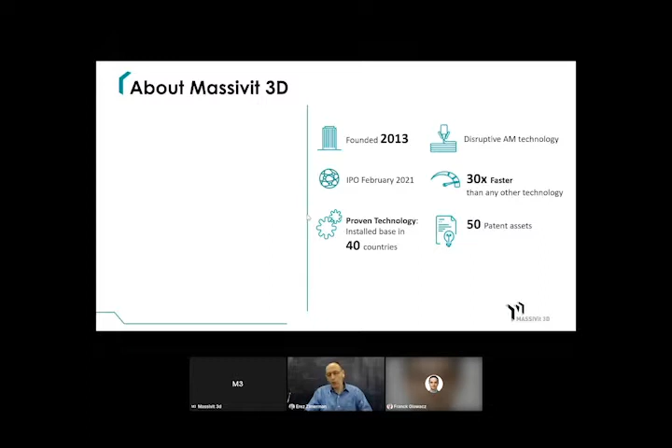Before we start, I would like to explain to you a little bit who we are, who is Massivit 3D. Massivit 3D was founded in 2013, and we have a disruptive technology for additive manufacturing. Our technology's main claim to fame is the ability to print 30 times faster and to produce molds faster than any other technology. Our technology, of course, is backed with 50 patents around the globe. We are a public company traded as of last year, and our proven technology already has an install base in 40 different countries around the globe with more than 164 units from our first generation technology.

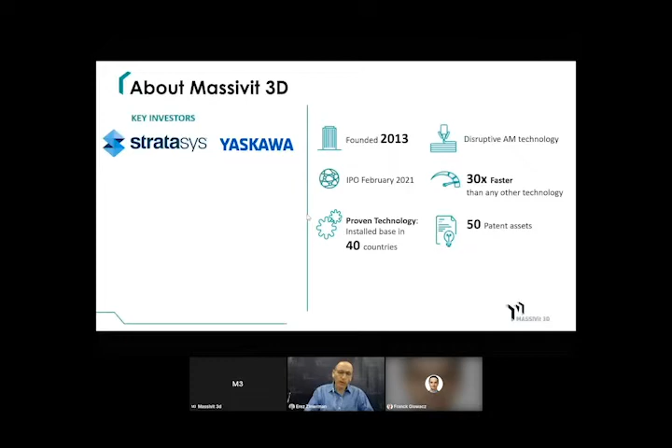A little bit more about the company: our key investors that invested in the company in the past are, first, Stratasys, one of the leading vendors in the 3D printing arena, and Yaskawa, the leading robotic arm Japanese company. Among them, we have financial investors that invest in the company. So that's really a brief slide about us. And Massivit was founded in order to address a strong need for large-scale parts in several industries, like automotive, marine, rail, aerospace, and others.

And usually when we talk about 3D printing, most of the 3D printing is focusing on small scale, let's say the size of a shoebox, and Massivit actually developed a large-scale 3D printer that can literally print a car bumper or train parts in hours instead of weeks.

Now, Benjamin, today we're going to talk about composites manufacturing, and about overcoming the bottlenecks that we have in the production line. Would you like to say a few words about the poll? Yeah, exactly. It's time for the first poll of this webinar. So I'm going to publish it right now. And again, for the audience, I invite you to answer the poll in the poll section at the bottom right of your screen. So let's publish the poll.

So the question is, how do you manufacture molds today? And you have four possible choices. The first one being you manufacture molds through hand layup. The second one being through CNC machining. The third one being through an additive manufacturing system. And the fourth choice is I don't manufacture molds. So please answer the questions.

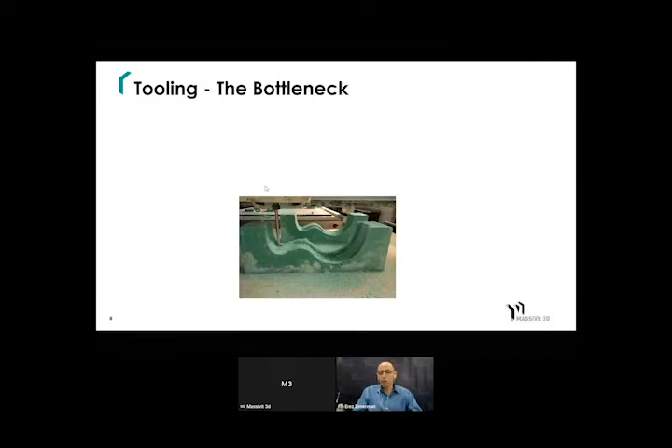And I'm sure that all the audience we have today knows that the bottleneck in producing composite parts, whether it's carbon or fiberglass, is usually the mold. The mold usually takes time to produce. It's slow, it's complicated, it's an expensive process, it creates lots of waste. And I'm sure that you're all familiar with this process.

Now, imagine the conventional mold production, which usually starts in CAD design. The mold production process takes 19 steps, and it usually takes 5 to 8 weeks until you get the final mold, and from there you are producing an end part. Now let's continue our interactive survey with the poll, and Benjamin, the stage is yours for the next poll. Thank you very much, Erez.

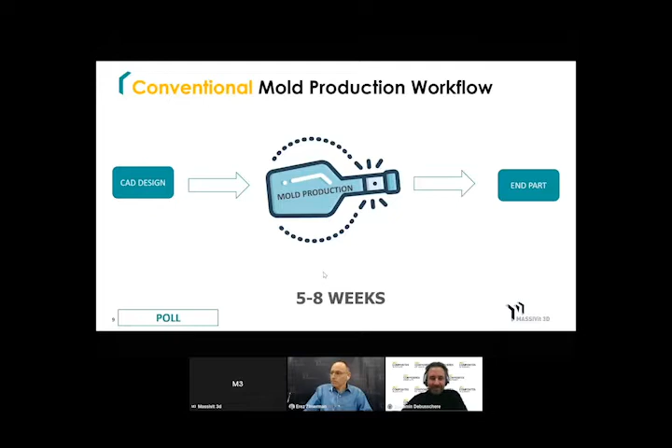So I just published the second poll. The question is, how long does it take you to build a mold? Less than 2 weeks, 2 to 4 weeks, 5 to 8 weeks, or more than 8 weeks. So please vote. And so far, about 50% of the audience answered 2 to 4 weeks. Now it's 40%, 25% 5 to 8 weeks, more than 8 weeks almost 30% now, and less than 2 weeks only 9%.

Can you please repeat the results? Yeah, so 42% is 2 to 4 weeks, 25% is 5 to 8 weeks, 25% again more than 8 weeks, and only 8% less than 2 weeks. So what is the average? It's about, let's say, 6 weeks. 2 to 4 weeks is the main answer.

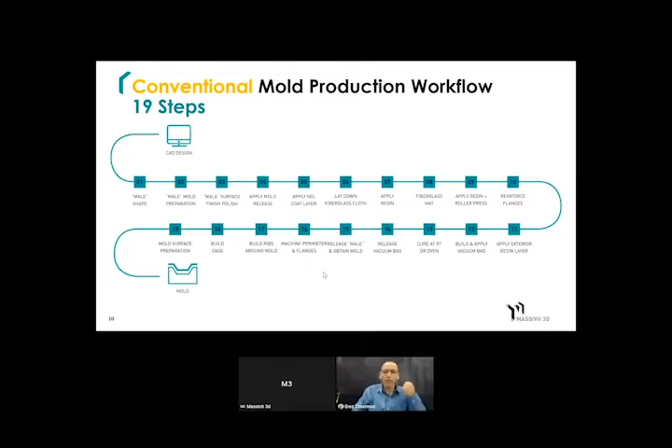The main answer. So imagine that instead of 4 weeks, you can do it in only 5 days. And instead of doing it in 19 steps, doing the male shape and so on and so forth, some people count it a little differently. But imagine that instead of doing it in 4 weeks, as the survey just showed, you can do it with just a click of a button. And instead of doing it in weeks, you can do it in days.

You're going to have the CAD design, you're going to have the Massivit solution, and then you have the mold being prepared. Now, as I mentioned, instead of 19 steps, you can do it in only 4 steps: print the mold, put it in an oven for curing, remove the sacrificial pattern, polish it, whether it's done with CNC or manually, and then you have the final mold.

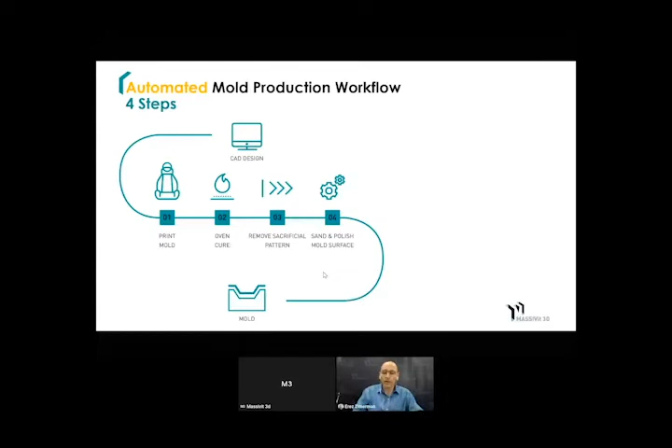Now, during my presentation, I will talk about our groundbreaking technology, and you will see in a minute a video that we prepared that demonstrates what are the 4 steps. Now, we are producing automatic tooling for composites within days.

I'm happy to hear in the previous poll that 15% of the people in this meeting today are using 3D printing to produce molds. And we developed a cutting-edge technology, the Massivit 10,000, that can print directly isotropic molds. And we can do it 30 times faster than any other technology. And as a rule of thumb, we can print about 35 centimeters an hour in the z-axis.

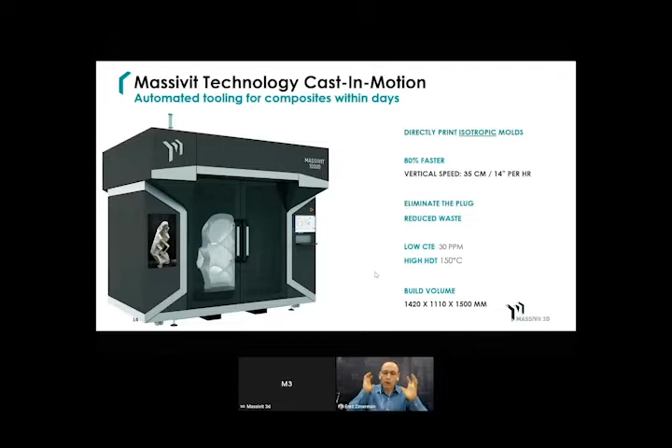There is no need for plugs. You reduce the waste. We have an excellent CTE and HDT, and the build volume is about 1.4 meter by 1.1 by 1.5 meter. Now, you will see in a minute how it works, and let's see this video that demonstrates, and later on you can also see with Nir how we are doing it in a live demonstration. So let's see a quick video of how the technology is working, and I will explain in more detail, of course.

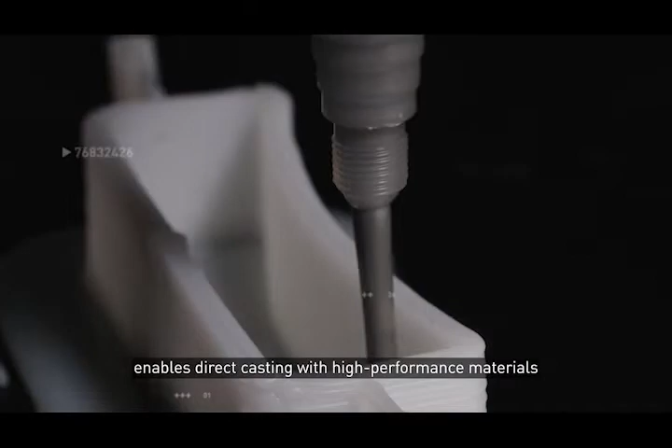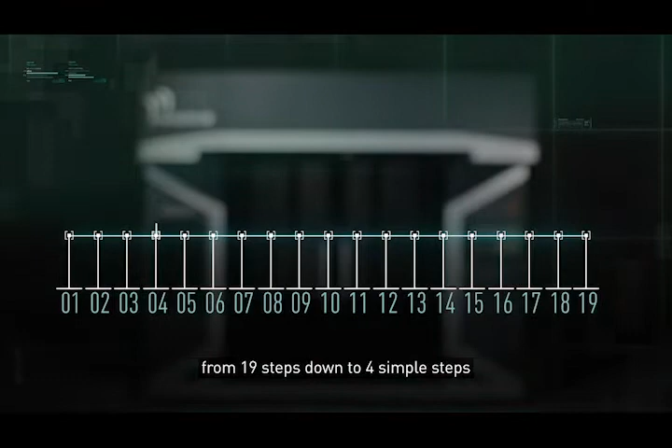The Massivit 10,000 automates tooling for composite manufacturing. This cutting-edge additive manufacturing system enables direct casting with high-performance materials to dramatically speed up tooling. Introducing the world's first isotropic 3D printed mold. The Massivit 10,000 empowers composite material manufacturers to produce custom molds, tools, mandrels, plugs, jigs, and fixtures within a matter of days instead of weeks. The Massivit 10,000 shortens your mold production workflow from 19 steps down to 4 simple steps and eliminates the need for a plug. So how does it work?

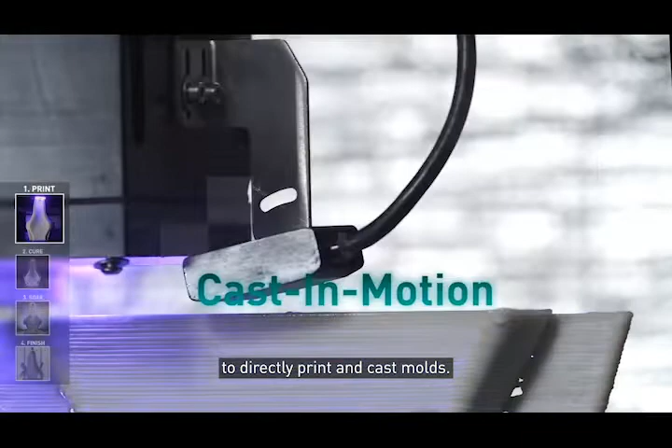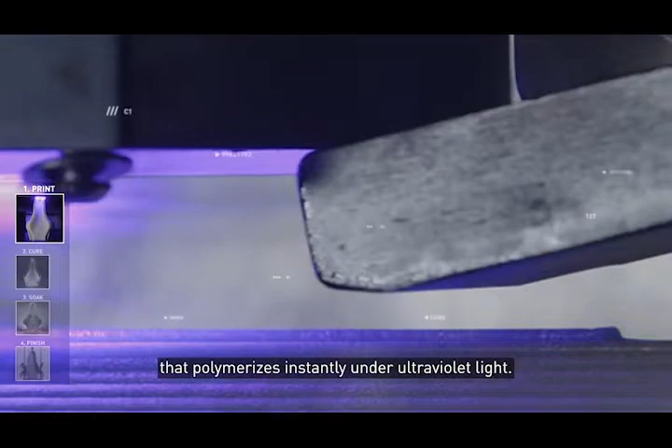The Massivit 10,000 utilizes a dual-head system to directly print and cast molds. Based on an initial CAD design, the first head 3D prints an outer sacrificial shell at high speed. The second head intermittently casts a thermoset material into that shell as it builds. The shell is comprised of 2 thin walls made of water-breakable photopolymer material that polymerizes instantly under ultraviolet light. The thermoset material forms a solid isotropic mold. The mold can then be post-cured in an oven to improve its mechanical properties at elevated temperatures. It is then simply immersed in a bath of plain water, causing the shell to crumble away.

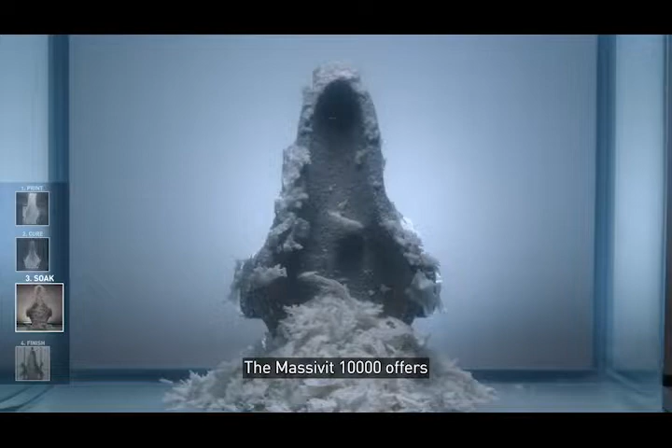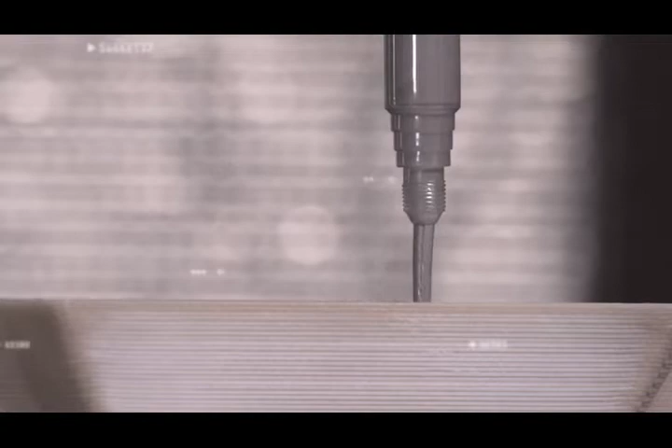The Massivit 10,000 offers near-net shape casting. The mold can be post-finished as needed. Your high-temp, high-performance isotropic mold is now ready for use within less than a week. Benefit from advanced casting materials that ensure consistent mechanical and thermal properties across all axes. Discover digital tooling for a wide range of industries including maritime, automotive, rail, defense, aerospace, sporting goods, and home refurbishments. Join the digital revolution with the award-winning Massivit 10,000 additive tooling system, offering automated, high-speed tooling for composite manufacturing.

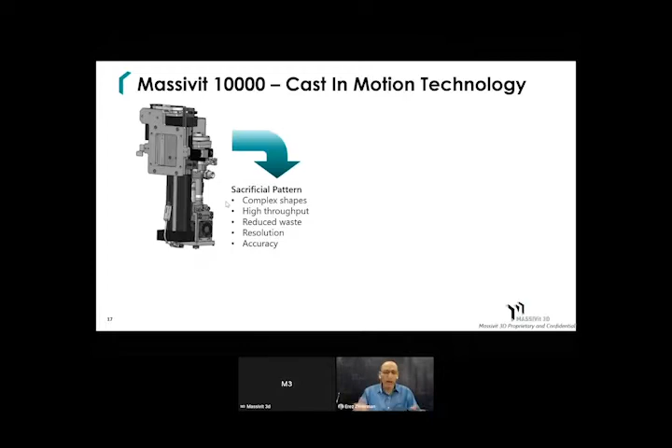So indeed, as you see, we have a disruptive technology that we call Cast in Motion. And I will just emphasize again that we have one head in our printing system, which is called Massivit 10,000, that prints a sacrificial pattern. The sacrificial pattern is printed with water-breakable material that can print complex shapes at high speed. There is no waste creation, and the resolution is high, and of course this is accurate. So that's the first head.

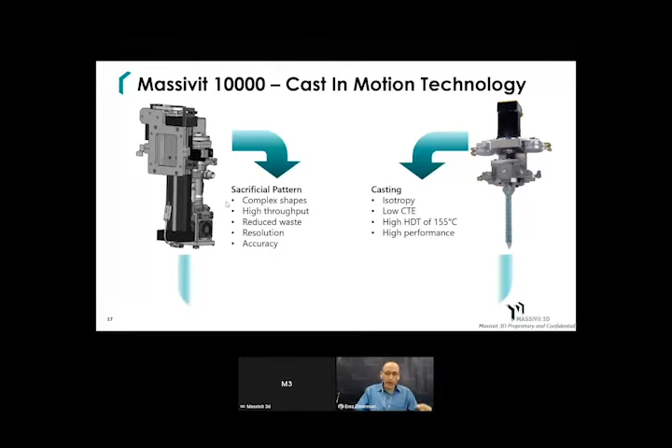And then we have the casting head that actually comes and prints isotropic material with low CTE and high HDT that can actually work in high performance, and this is a durable mold. And this creates efficient digital tooling of molds. Now, the materials, which I'm sure you're all interested in, what are these materials?

So the sacrificial shape or the envelope of the mold is made of an ultra-fast sacrificial shell made of water-breakable material. There is no need for support structure. I see that some of the participants here are familiar with 3D printing. So there is no need for support structure. This is a very unique technology that we have. And then you dip the part in the water and it's unattended shell removal after several hours.

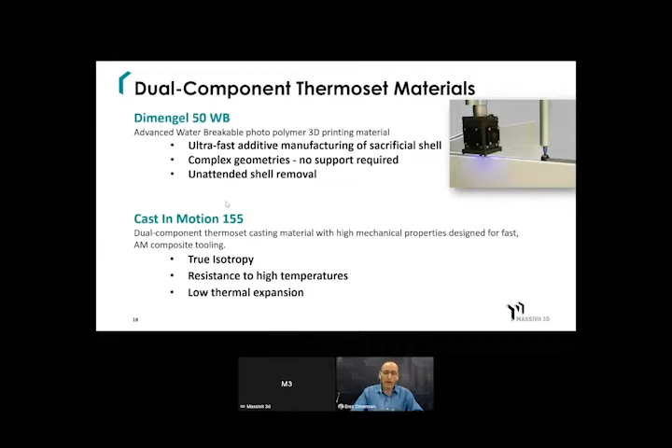Now, the Cast in Motion material, we're actually using an epoxy-based material that has chopped fibers inside and other fillers that bring true isotropic mechanical properties. It has resistance to high temperature and it has low CTE, as I mentioned. Now, this technology enables an 80% reduction in time, dramatically reduces the cost of mold production, and it's almost labor-free, enabling people to do other tasks while they are utilizing our machine.

Now, Benjamin, we have another poll here, and I'm interested to learn what the next survey from our audience today will be. Thank you, Erez. That's true. It's time for the last poll for this webinar. I'm just publishing the question. Have you ever considered producing molds using additive manufacturing? So the answers are simple, yes or no.

Please answer the question. So yeah, most of the audience consider producing molds using additive manufacturing, around 90%. Which is really good. Yeah, 92% consider producing molds using additive manufacturing.

Indeed, this is very encouraging news. I see that the people are open for new technology, and this is important because if people are 92% already engaged with 3D printing technology, they are aware of the pros and cons of 3D, and definitely at Massivit, the fact that we are printing isotropic molds is a game changer in terms of mechanical property of the mold.

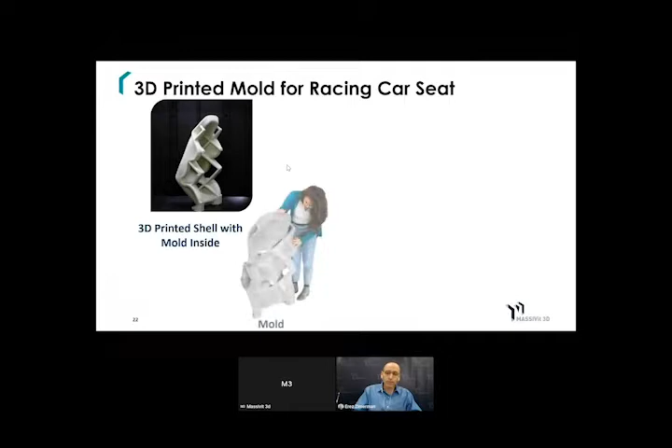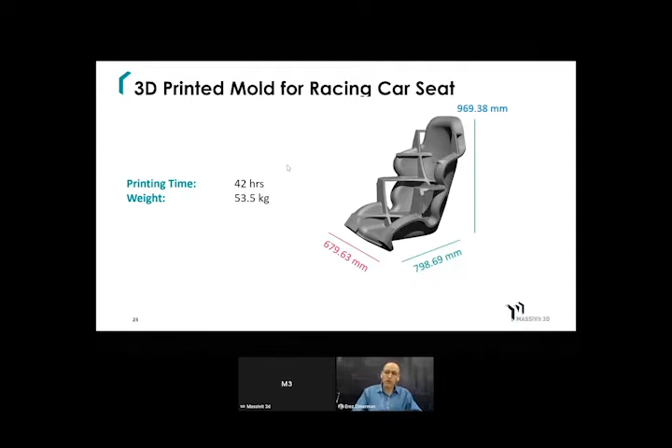So to give you some proportions of size, you can see it's about 90, almost 1 meter height, almost 80 centimeters width, and 67 centimeters width. And you can see that the printing time to produce such a mold will be 42 hours only. And this is why we say, as a rule of thumb, it takes about 5 days to produce such industrial molds. Some of the molds will be much shorter than 5 days.

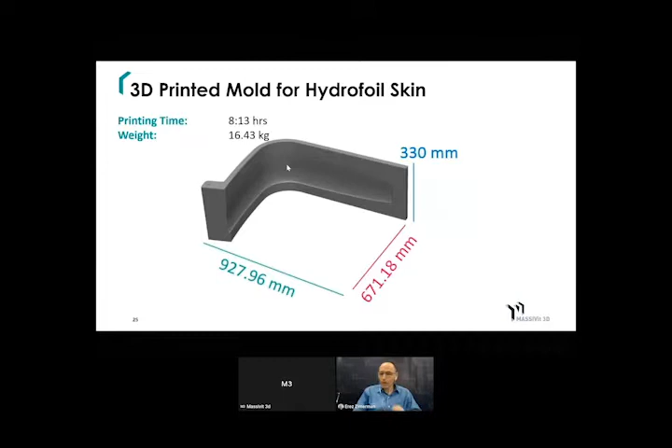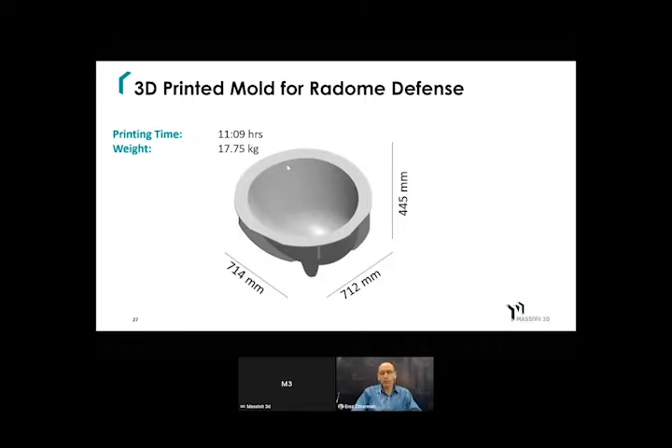Another nice example, this is a radome for the defense industry. You can see this is like the dome in front of this vehicle. And you can see that, again, the proportion is about radius of 71 centimeters, and the z-axis is about 45 centimeters. And to print this radome mold will take about 11 hours only. Imagine how much waste you need to create when you produce this radome in CNC machines.

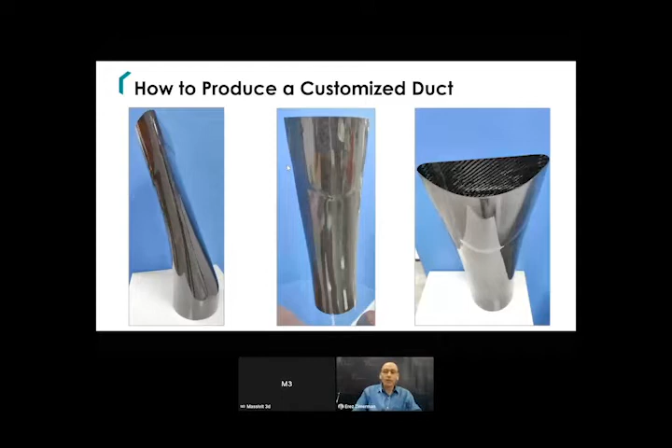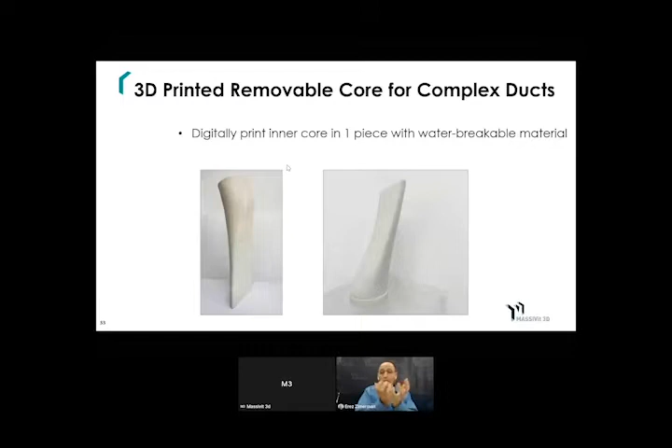And with Massivit, I just want to show you quickly the process. You just bring your CAD, you save it as STL. STL is the format of 3D printing. You drop it to our tray in our Massivit software. You print it as you've seen in the video. This is a water breakable. It printed only the water breakable shell. Then afterwards, you lay up around the printed core with one continuous piece of fabric, sponge it with epoxy, add it into a vacuum bag.

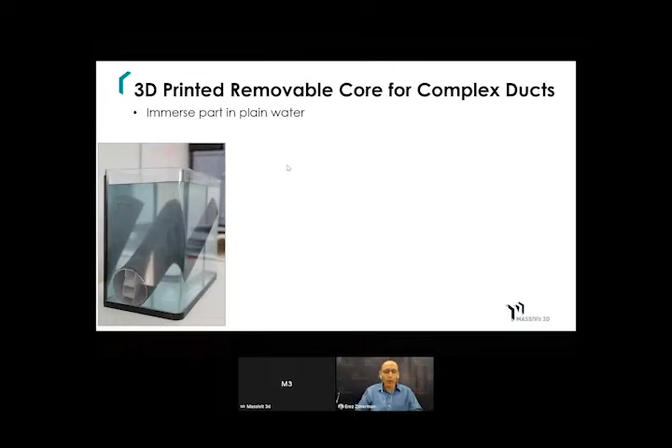Then in order to remove it, it's a one-time sacrificial tool. You're actually dipping it, as you see here, in simple tap water. There is no chemical, very simple, very easy to use. The inner core crumbles into flakes, and it leaves the outside composite duct, as you can see here, as the final product. And again, to produce this part in CNC or alternative technology is ten times more complicated, I would say.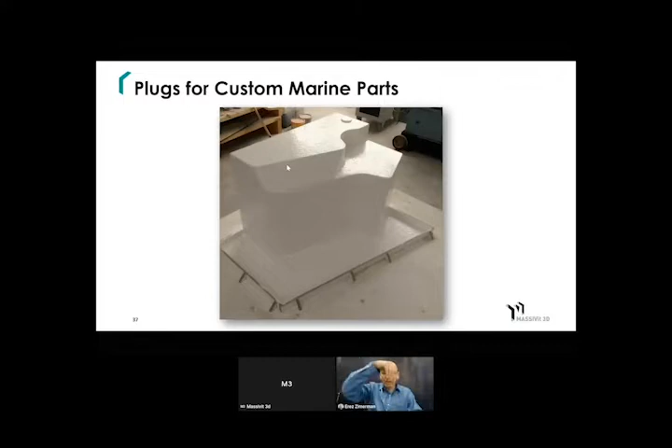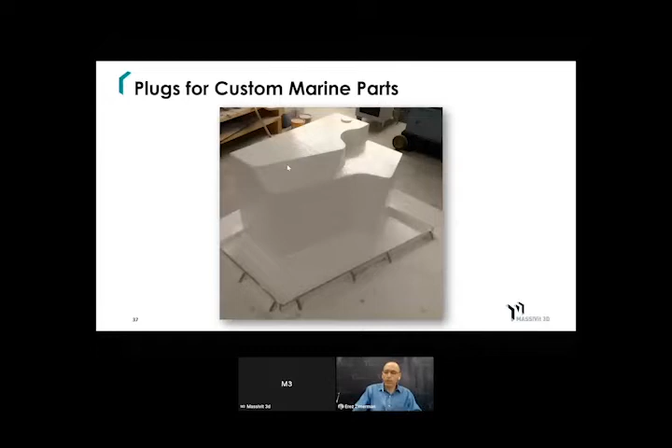Now, plugs. Plug is also very important. I'm sure that you're all familiar. This is very simple to print. As you've seen in the video, you print the shell, cast our material inside, dip it in the water, the walls are falling apart, and then you can use this as a plug. Some people call it master, some people call it a plug. And this is a part, by the way, of a boat for the marine industry. So again, all kinds of applications can utilize our machine.

This machine can also be used for prototyping. You can print all kinds of parts. Here you can see the back area of the yacht was 3D printed, reinforced with fiberglass directly on our material, sanded and polished, and you can see the final part. This is a train where the front bumper was 3D printed with Massivit. And of course, it can be used for other molding applications like thermoforming, utilizing the Massivit 10,000 technology.

I'm sure that you're all veterans and familiar with the composite industry, and we are applying to aerospace, defense, marine, construction, sports goods, automotive, and renewable energies. These are all the use cases and others for composite material. Now, this is all excellent in our presentation, but I think it's very important now to let Nir do a live demonstration from our production line downstairs.

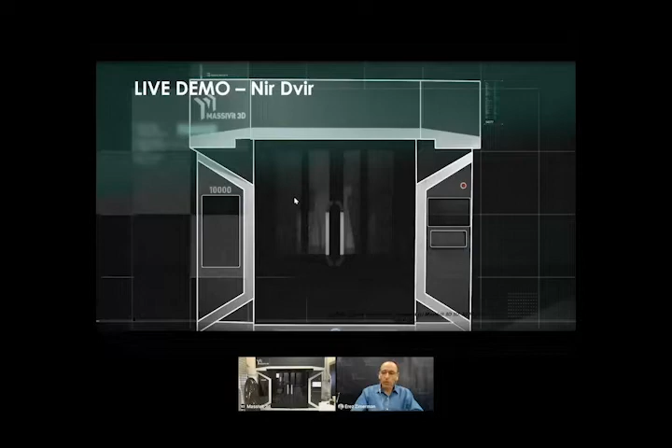So Erez sent a lot of information over, and I want to make it real, to show you the technology and to try and show you a live demo of the Massivit 10,000. We are standing here in Israel at the headquarters, in front of the machine. You can see the volume of the machine. Again, we talk about a print volume of 1.1 by 1.4 and 1.5 meter height.

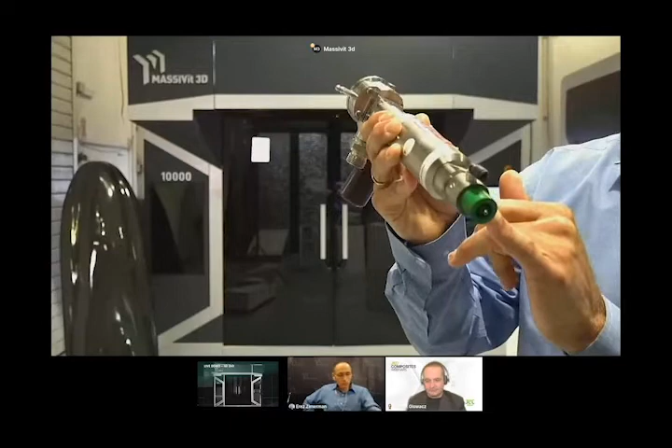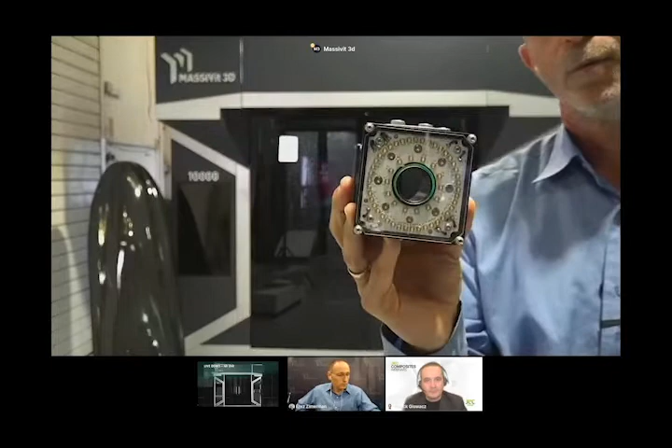The key for us is the fast printing. And how do we do it? First of all, we use our core technology and our dispenser. As you can see here, the dispenser pushes material through a tip that determines the resolution that we can apply. We have different resolutions. On top of the head, you will see that we bring a UV ring. The UV ring that you can see here will cure the layer immediately.

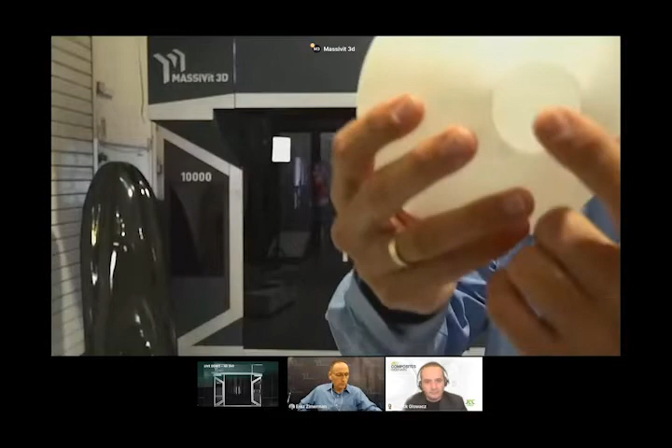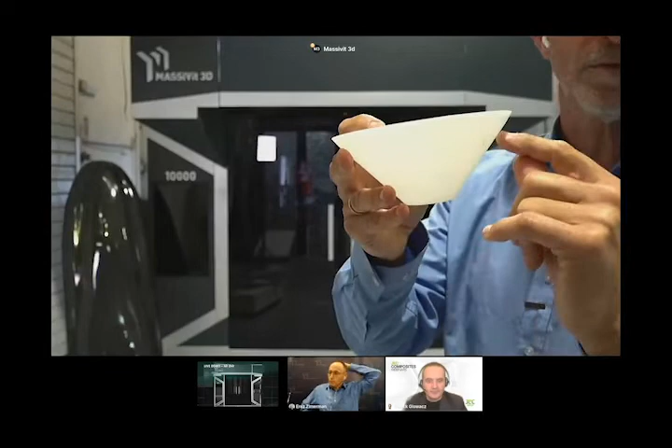It means that I can print layers on top of each other, and in the same way I can print layers next to each other. If I can print layers next to each other, I don't need any infill or support material. For example, this is a hollow object we printed in minutes. I'll try to show it to the camera. It is a hollow object, printed one layer on top of each other and one layer next to each other. By that, I'm saving a lot of material, a lot of cost, a lot of time to remove the infill or support. And this is our GDP technology on which everything is based.

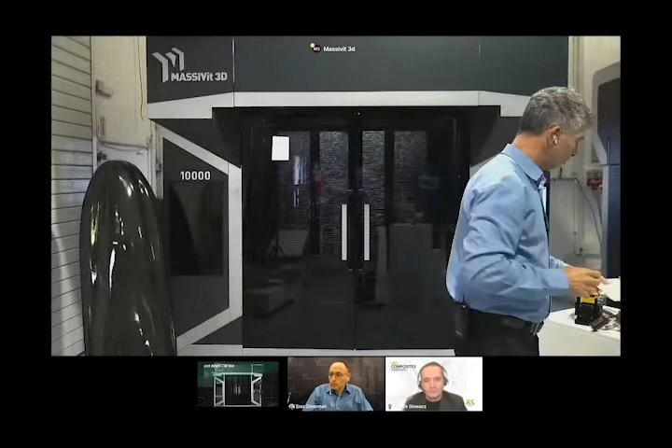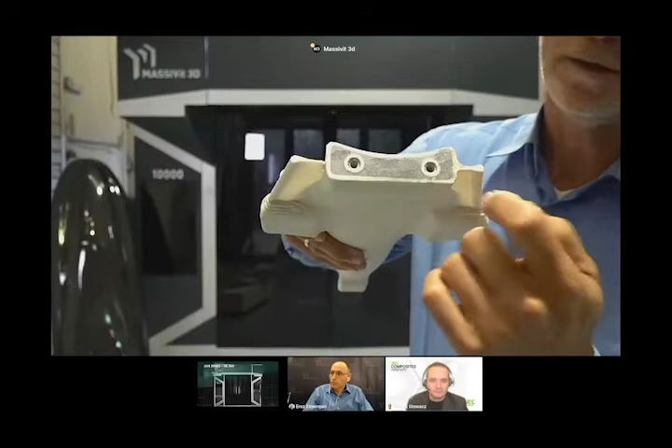Now, adding to that, going into the Massivit 10,000, as presented by Erez, we want to show the cast-in-motion technology. For cast-in-motion, we are using two printing heads. The first head does the shell, as you can see here, the white area, and the gray area is the casted material. Here we talk about epoxy, low CTE, temperature up to 155 degrees Celsius. Once my geometry is printed, I will cure it, I will soak it in water, the shell will fall apart, and I will remain with the mold.

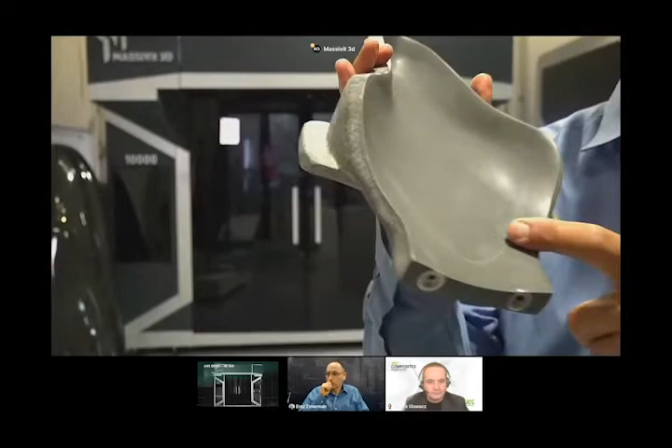This is my mold. This is what I will remain with. Okay, and as you can see, the surface still needs a touch, a small touch. And after the finishing process, I will get a very smooth surface with just a little bit of machining, milling, or sanding, depending on the quality that you want to reach.

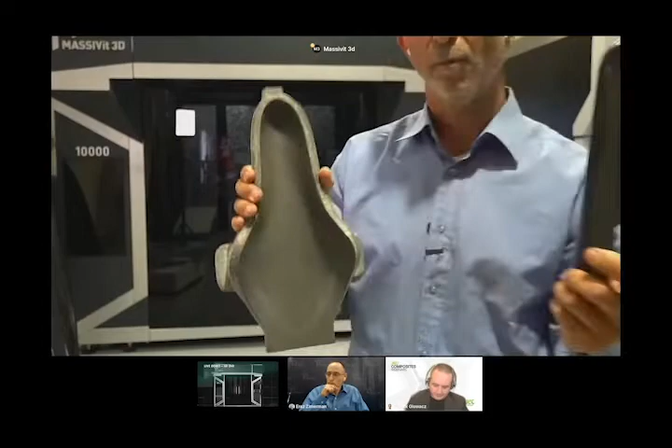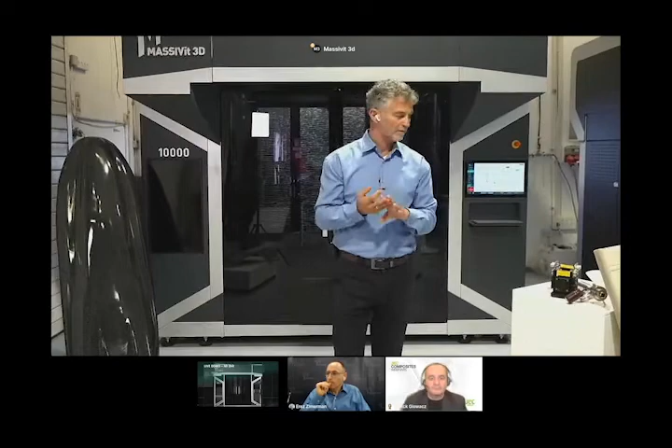Again, you as the end customer, of course, would like to generate carbon parts with the molds that we are preparing in days instead of weeks. Erez was talking about creating molds, creating masters, and also mandrels. I want to show the mandrel. If you have a carbon piece that has an undercut and you want to create it, you need a special mold. Not anymore in this size. You can print a mandrel.

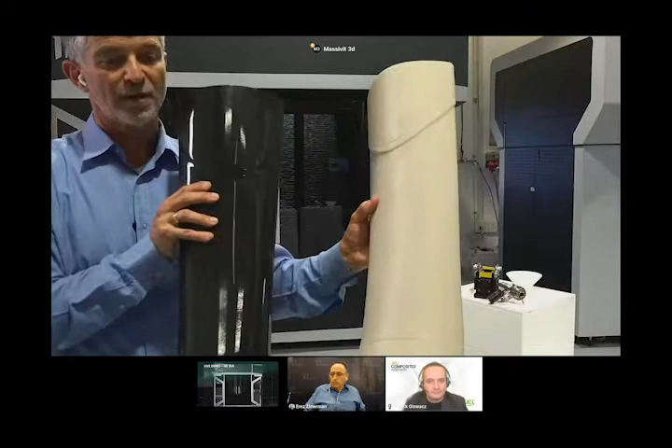As you can see here, this is the mandrel of that part. It's a one-timer mold. Okay, you can print the mandrel, put the carbon fiber on top of it, cure it, and dip it in water, and you have your carbon piece, not within weeks, within days. Okay, so this is also important.

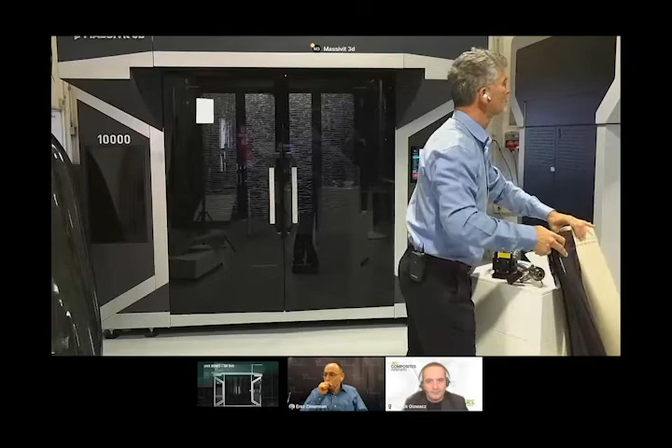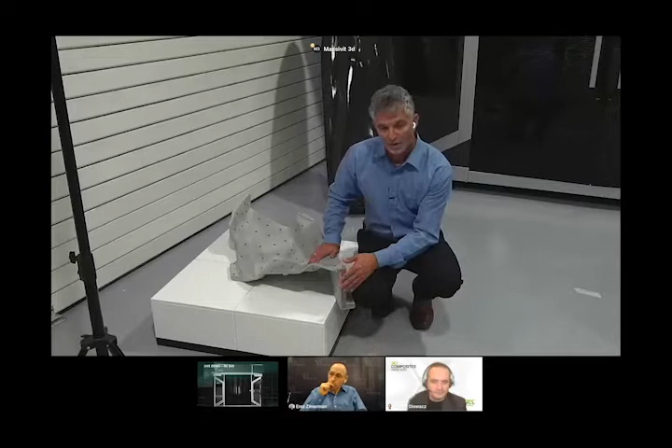Okay, I want to show the mold here. I don't have a master here, but I will show a mold here. It is after milling, of course, and sanding, and important to say that when we create the mold digitally, we already take into consideration the jigs and fixtures. So you also save a lot of time by creating the form that you need for optimal heating properties and optimal handling properties if you need to carry it from one side to the other. Okay.

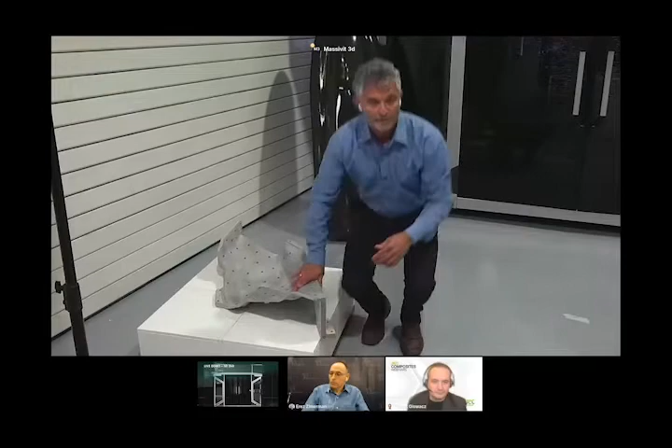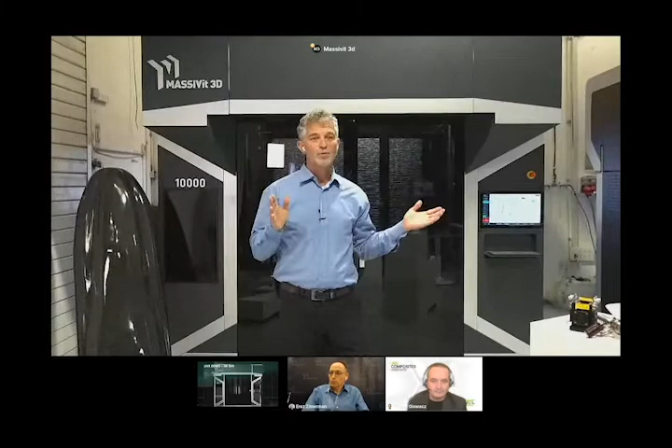What we see here, this is the Massivit 10,000 that will go to JEC World now in May. It is ready to be shipped. So what we will do for you, we are going to move to one of the machines of our production line that is producing today, and show you the casting in motion live in just a few seconds.

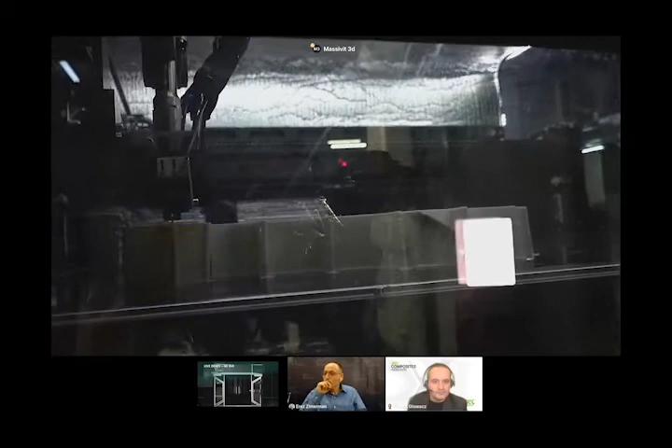Okay, I hope that you can come closer to the camera, to the front. Okay, I hope it is visible enough. Yes, Nir, we can see the printing process. Nir, we can see the UV print.

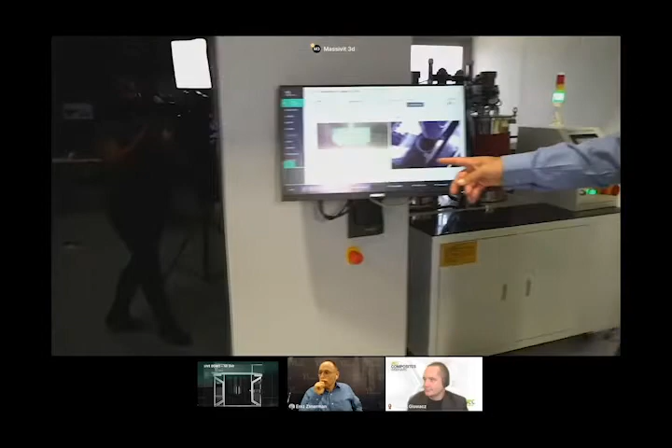Okay, so the operator, you can see two cameras. The first camera is the camera of the GDP head. It's printing with the curing at record speed, and on the right side we will see the casting head that will cast every few moments. From my side, this is most of it. Maybe we will also show the casting system that is coming.

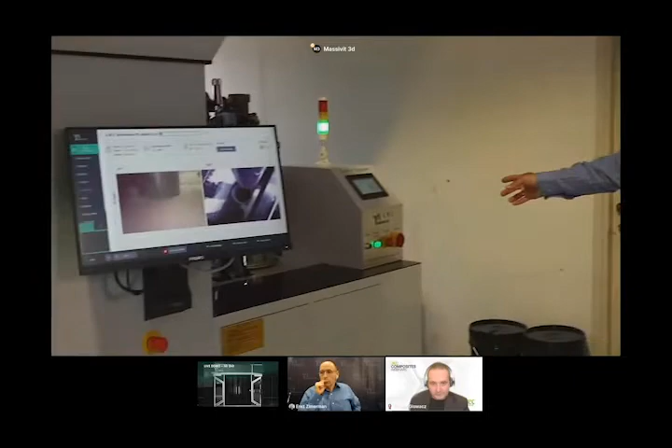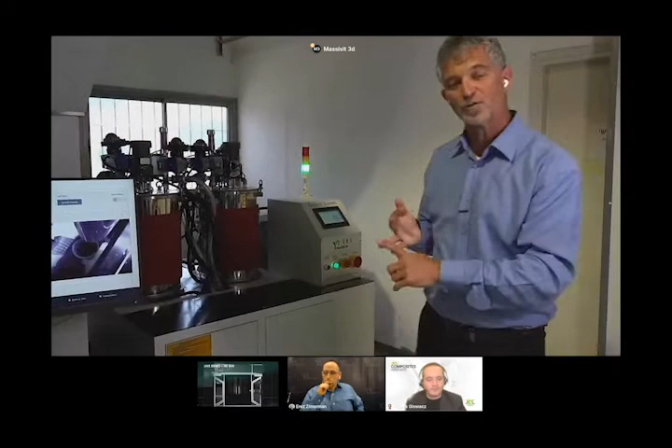Next to the Massivit 10,000, we have a mixing unit. Okay, this is the Massivit CMS. Here we are mixing epoxy, part A and part B. Important to say that, as you know, epoxy will start the reaction immediately as the two parts come together. And this is happening only during the casting process, just at the head. So the casting system will allow us the right temperature, the right viscosity, having everything ready for the casting process in the machine.

What I suggest is that until we get to see the casting process, maybe in 3 or 4 minutes, we will take a few questions with Frank, and try during the questions to also see the casting process.

Okay, thank you, Nir. Personally, I have to say that I think your solution answers some of the needs that are not fully met with other technologies yet. In our industry, all starts with a mold. A good mold is the key to a good part. It's absolutely mandatory. If you're not able to manufacture something properly as a mold, there's no point making composites. So molds are usually costly and take a lot of time to manufacture, as you said. The drawbacks are in manual making. It's really time consuming.

Traditional epoxy tooling boards require a lot of milling, and molds that are made by fused deposition modeling, another additive manufacturing method, often imply anisotropy. In addition, nowadays, fast and bespoke solutions are required in many applications. Plus, we need to reduce waste of materials. And I think your solution overcomes most of these problems. And yes, it is a new solution.

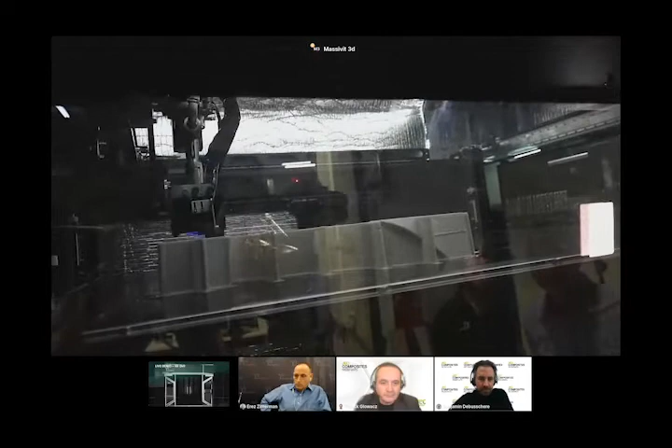Okay, thank you, Nir. Maybe time for the demonstration, and we will have some other questions from the audience. Kim, maybe it is easier to show it on the screen. Okay. Great. We can have another answer till we get the casting process in action.

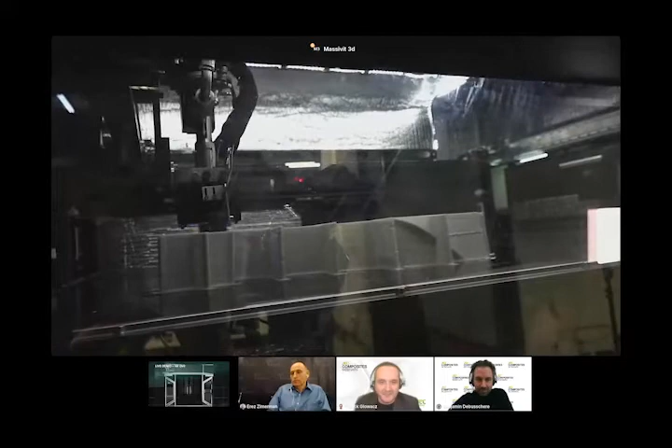We have a question about the resin you can cast with the casting head. Someone is asking if you can cast thermoplastic resins. I have a really big doubt about that. It's your take. Wow, it's a tough question. We proved in the lab that we can cast a lot of materials. Kim, maybe you can show shortly the mixer that we are using. We are using a relatively simple mixer with a big hole. This will allow us to use different materials.

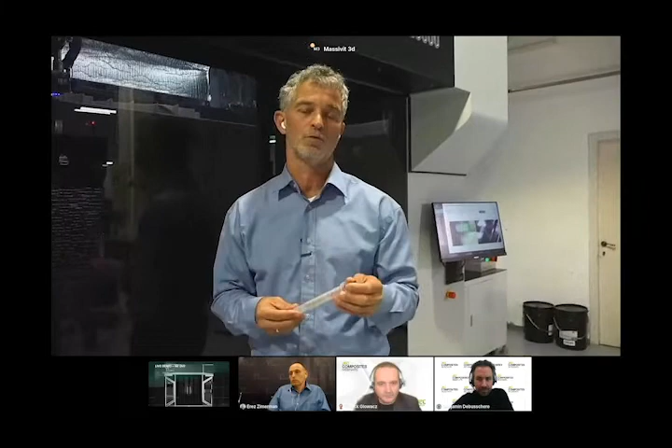This is how we design our different epoxy systems, and I believe this technology will enable us to print other materials too. I cannot confirm thermoplastic at the moment, but we know there is some need. Our first technology has 5 different solutions, based on customers' demand. If there is demand, we want to have it.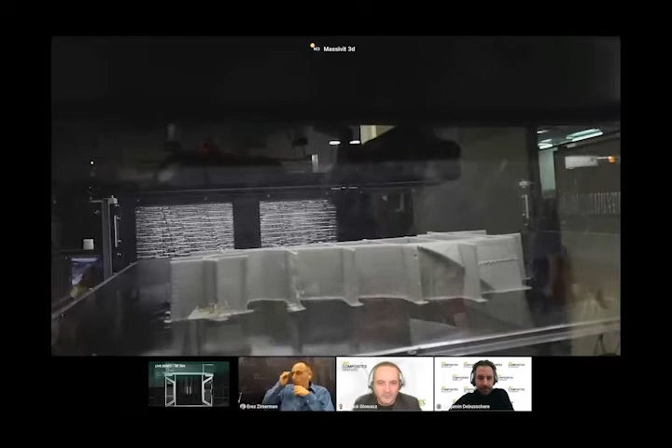What you can see now that the printing head moved aside is the casting head, actually the epoxy that was waiting at the entry of the machine to be mixed live and casted, one layer on top of each other. And as you remember, the lower layer is still in green status, and they are mixed together. The volume that we are casting is very big, so the casting process is relatively short, and the GDP head will go immediately into action and print the next layers.

I hope that the casting process came through. Thank you, Kim. Do we have more questions, Franck?

Yes, before leaving the audience question, I have one. What about the availability of your solutions? Where can you send the Massivit 10,000? Have you got, for example, a representative in France?

First of all, about the availability of the Massivit 10,000, we are in a beta stage where we already have our first beta, and we are going to have more availability from the second part of the year after the beta testing. About sales, service, support, Massivit America, Massivit Europe, and Massivit in Asia each has its own infrastructure. Specifically in Europe, our demo center in Massivit Europe is located in Belgium. And specifically, if you ask about France, in France we also have service engineers.

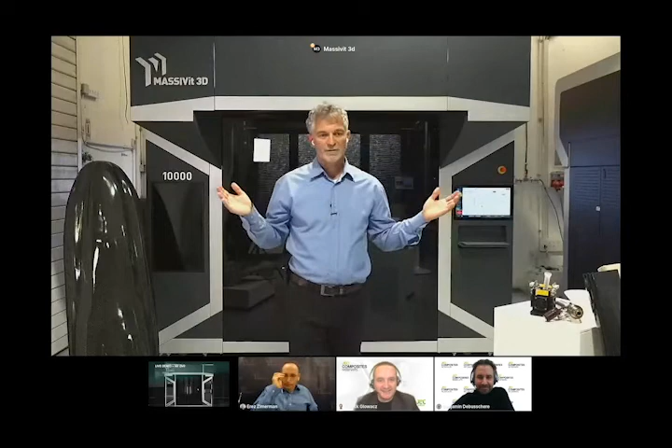Okay, so a global footprint, which is good to sell this kind of equipment. If you have more than 150 units around the world in 40 countries around the globe, you do need a good infrastructure and stable system.

Thank you, Erez. We have some other questions if we have time. Benjamin? Yes, of course. Thank you very much, Franck, for this, and thanks, Nir, for the live demo. We have very positive feedback in the chat about the demo. The audience enjoyed it a lot. So let's now open the floor to questions. We already have a few in the question tab. Thank you very much for this.

Let's take the first question from Emil Edlund, who is asking what geometrical tolerances are possible to attain directly from the print process before reductive processes, if needed. Okay, about the tolerance and accuracy, it is a good question. First of all, in terms of the machine, it is designed to be up to 4 times more accurate than our GDP system. Our GDP system is plus minus one millimeter on a meter.

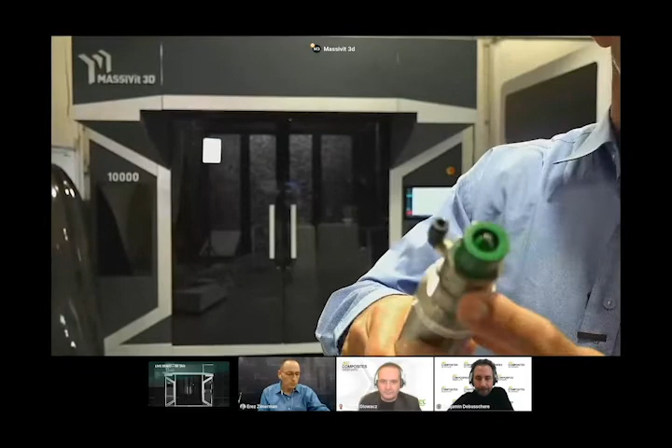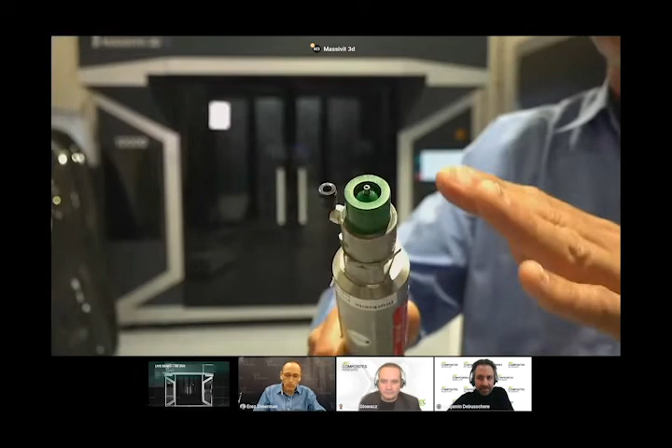Thank you. Next question from Ahmet Abdullah Goksen. Does the dispensing head need to be changed after every print, or is there a cleaning system on the printer? If so, is it air purge or solvent purge? First of all, there are different systems. During the printing, we have an automatic system connected to AI that will clean the head in case the head is getting dirty. It is cleaned automatically, and if needed, there is also a cleaning system at the machine, and it will be sent automatically to be cleaned. This is concerning the tip. Every shift or every night, you will clean it and you can reuse it.

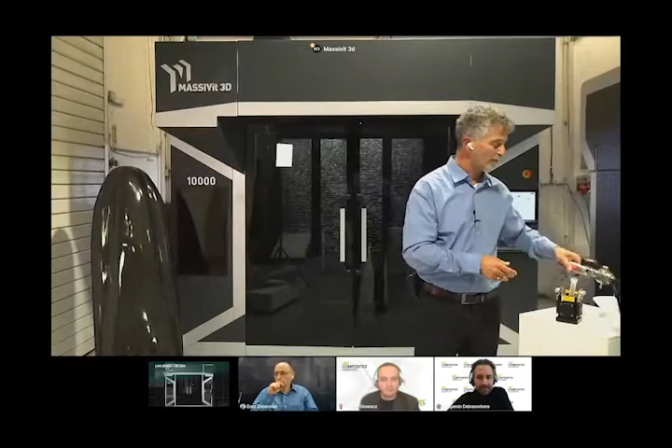About the head, we claim that this head can withstand many hours. Customers of ours are using those heads longer than a year. And if not, you can refurbish the head with us or buy new ones. They are not a consumable such as our printing material. You can use them again and again and again.

Thank you, Erez. Next question from Quentin Gauvignon, who is asking, can you add short reinforced carbon fiber in the isotropic resin to reduce the CTE of the mold? I forgot the name, but he's already telling everyone what we did.

In order to come to low CTE, we do add some chopped fibers, and this will allow us to come to the lower CTE than aluminum. Okay, so yes, we are already using chopped fibers in our solution, in our epoxy solution.

He is right, or she, I'm sorry. He is. He, I'm sorry.

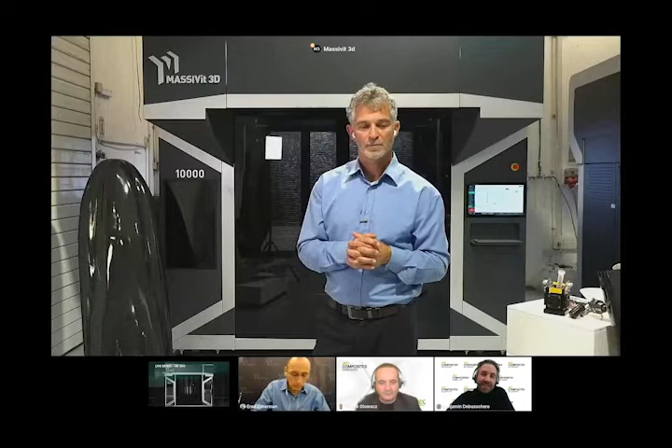No problem. So the next question was, is the CTE comparable to aluminum tools? Is it higher or lower? So you just answered it. Yes. We are targeting lower CTE than aluminum with the target to make bigger molds than aluminum. We know that after half a meter, most of the market will move out of aluminum.

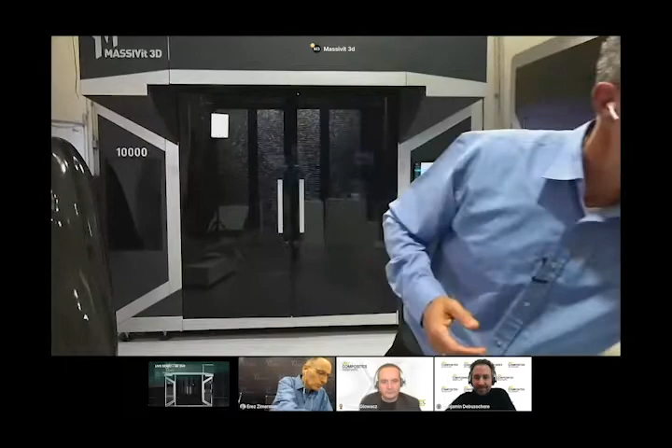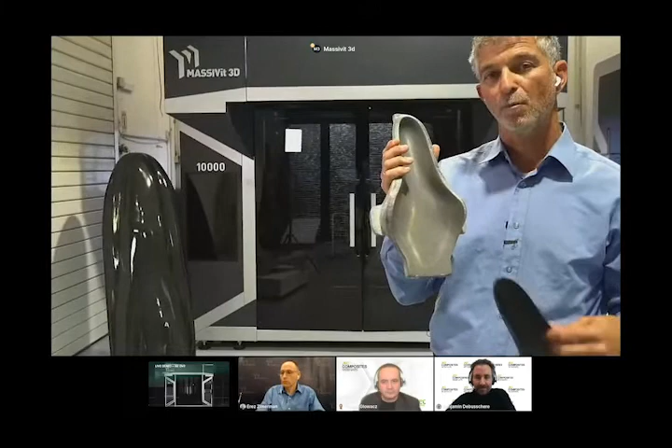Thank you. Next question from Peter Bernhofer asking, taking the feet shell as an example, is it possible to produce more than 100 pieces? Yes, yes, yes. We haven't come to the limit of manufacturing, but the specific mold is a very easy mold to release the part from. So we believe that it will stand more, of course, more than 100 times. Again, it is not designed for thousands of times, okay? But more than 100, it should be done easily, for sure, with this geometry.

Thank you again, Nir. Next question from Quentin Gonvignon. What are the stiffness and strengths of your isotropic resin? Hi, let me take this question. Yes. We have a clear data sheet. When you look on mechanical properties of any material, there's a clear data sheet, and we highlighted several of the things on the data sheet, which is the HDT of 155 Celsius degrees. There is CTE, there is tensile strength, and others. You can send us an email, or see it on our website, you can see the full technical data sheet of our printed mold material.

I see Nir is back. Am I back? Yes, you're there, Nir. Okay. That's good. I don't know why I was disappearing. Thank you very much, Erez. I needed the help here.

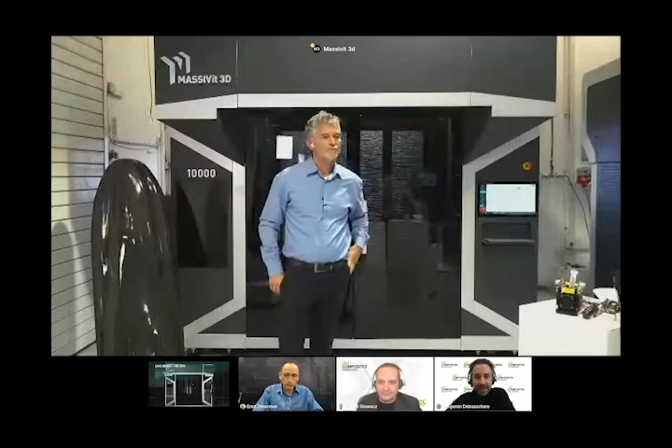So let's move to the next one from Marcel Brijne, who is saying this is a very nice technique. Could you give us a few words or your thoughts on how your technique compares to the print tech from AirTech Advanced Material Group? Thank you in advance.

Okay, I'm not claiming to be the expert in AirTech, but if I'm not mistaken, we talk about FDM. FDM solutions need to melt plastic, whether a wire or parts, and then cool them down. They need to be melted one on top of each other, and actually can never be isotropic. Our solution, the way we cast the material, we are generating an isotropic solution, which is very, very important at the end when you are producing parts at a high temperature.

For jigs and fixtures, we understand that FDM is very good. But again, if you are referring to FDM, the major advantage is our capability to generate an isotropic solution, while FDM needs to be very careful when they put one layer on top of the other and connect it in order to get a good bond between the layers.

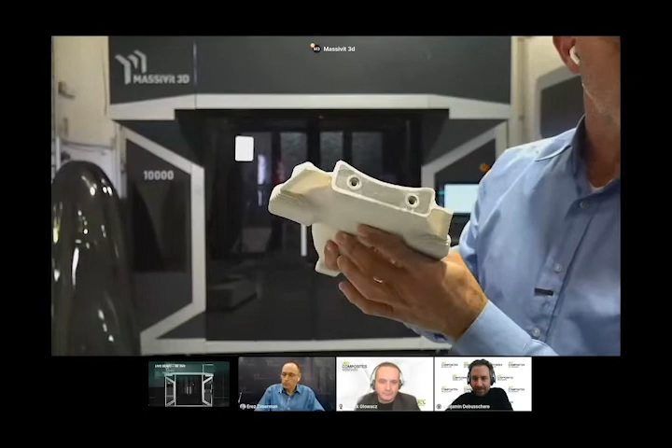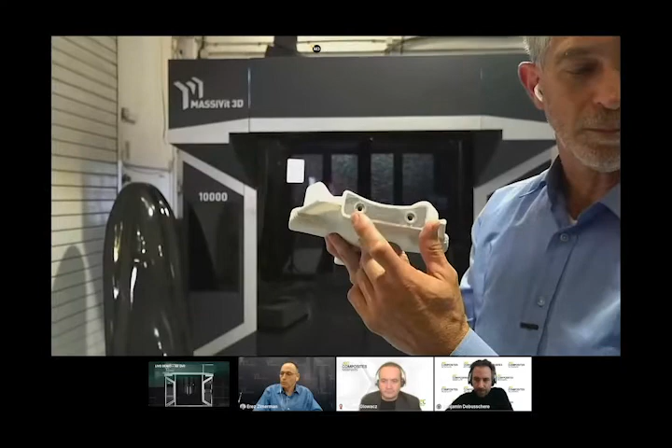Thank you, Erez. Next question from Zaim Refai, who is asking how the inserts are placed in the mold. Is it automated? It is not automated. I understand what insert he is talking about. We talk about those inserts. The reason that we use inserts has to do with the orientation of our solution compared to the CNC milling solution. What we want to achieve is quick mount to the CNC. The inserts are part of our table, and we can take the decision where we are printing in order to get the optimal adjustment for the milling process.

Thank you. A question from Hartmut Wolf, who is asking what to do with the water after dissolving the outer material. So the water is simple plain tap water. After the part was dissolved, you can just put the water in a simple drain. There is no need for special treatment. And if you look carefully, there is the shell that falls apart. This can actually be reused as a plastic material. You just separate it; it can be filtered, and this is very simple.

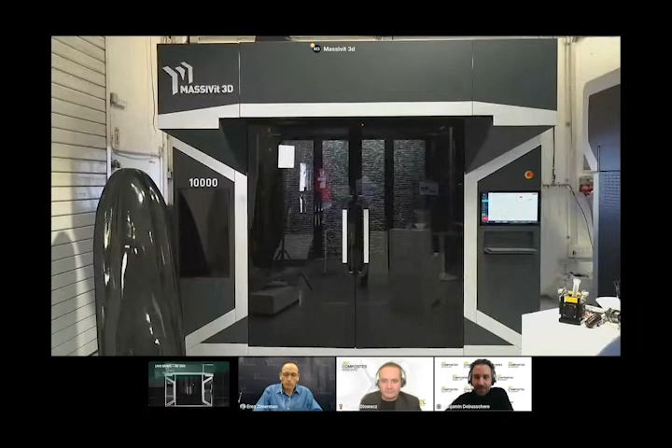Another question from Abhidip Kumar, who is saying he must say that it's a brilliant technology, so congratulations. Thank you so much for the compliment. Next question from Abhidip Kumar, who is asking, how did you conceive the shell casting concept?

How did we conceive? You mean how did we invent it? Yeah, exactly. I think I didn't mention it at the beginning of our meeting today, but the founder of Massivit 3D, his name is Gershon Miller, and he's actually the founder of Objet Geometries, today it's called Stratasys. And he's more than 30 years in the 3D printing industry,

and he actually is a very visionary person. And this is one of the things that he said, this is something that we can do. We can print supportless, and then we can cast inside. And based on his vast experience, we developed this technology. Thank you, Erez.

Rajendra Walalkar is asking if you have a presence in India. We have a presence in India. We have a salesperson. His name is Ashan. You can drop me an email or to our info, and we'll be happy to refer you to them. Thank you again, Erez. And we don't have in Madagascar, I have to say. But India is relatively important for us, and that's why we have a sales representative there.